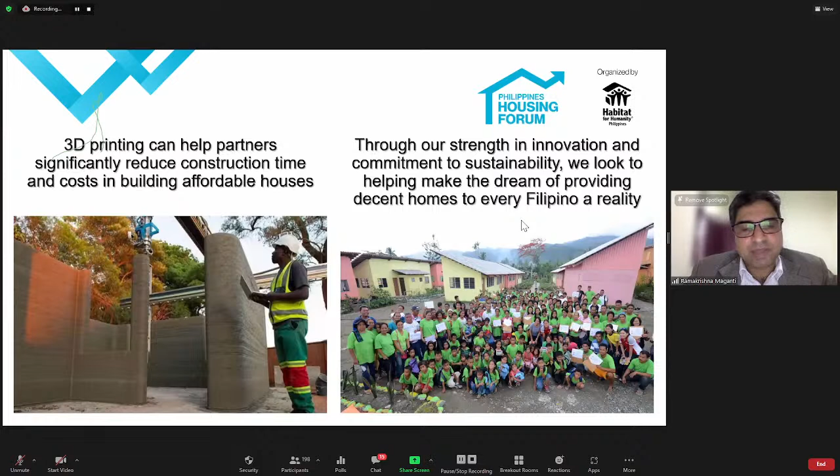Thank you, Mr. Maganti. Looking forward to the 3D printed house that you guys will make in the Philippines. And I'm really excited about water repellent cement. Looking forward to you guys launching that. Thank you. Thank you, Moni.

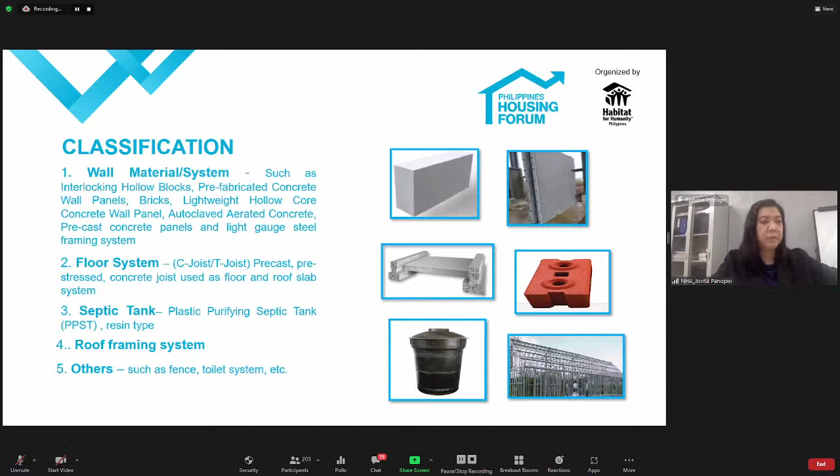So this is the process flow of how we accredit. First of all, the proponent will apply and submit their application to the AITECH Secretariat in NHA, and the AITECH Secretariat will check if the documents are complete.

If the documents are complete, then they will be issued an order of payment for the evaluation fee, to be paid in the Treasury Department of NHA. After giving the official receipt, that will be day one for their evaluation. Then after that, after a thorough structural evaluation, including the cost efficiency and if it's environment friendly...

If the technology is quite complicated, we request DPWH for a more comprehensive evaluation. But for 3-story and below, the AITECH Secretariat or the technical evaluator will finalize the report and prepare the consolidated report.

The AITECH committee meets on a quarterly basis. So every quarter, the interagency meets, and there they will deliberate the application for accreditation. So after a thorough deliberation by the members of the committee, if this will be approved...

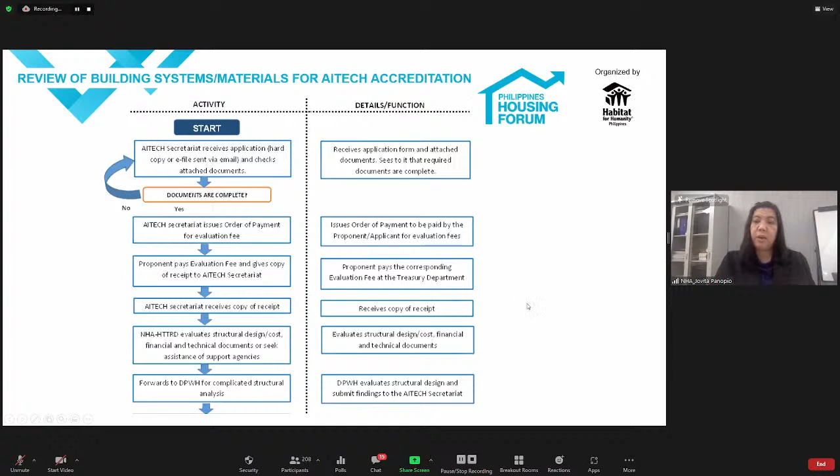After accreditation, we will be monitoring their performance because we base our evaluation on the documents submitted. In the monitoring, we will now verify the truthfulness of all the documents submitted.

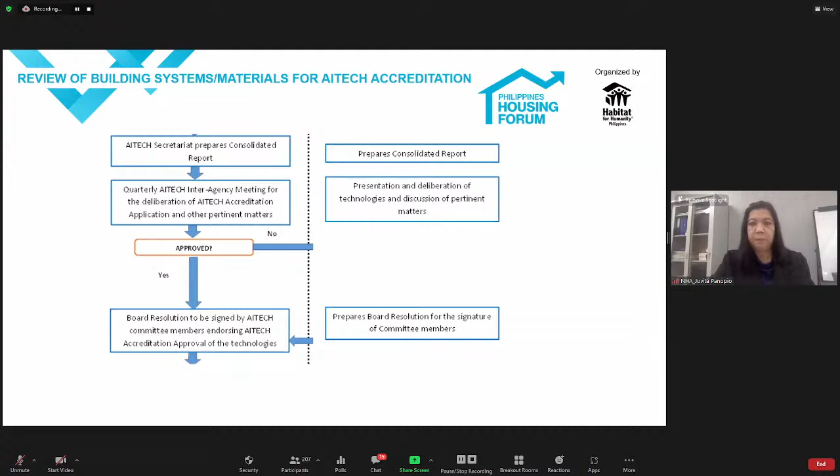So after the validity period, they can apply for a renewal. So that's all for the AITECH accreditation, and thank you so much for listening.

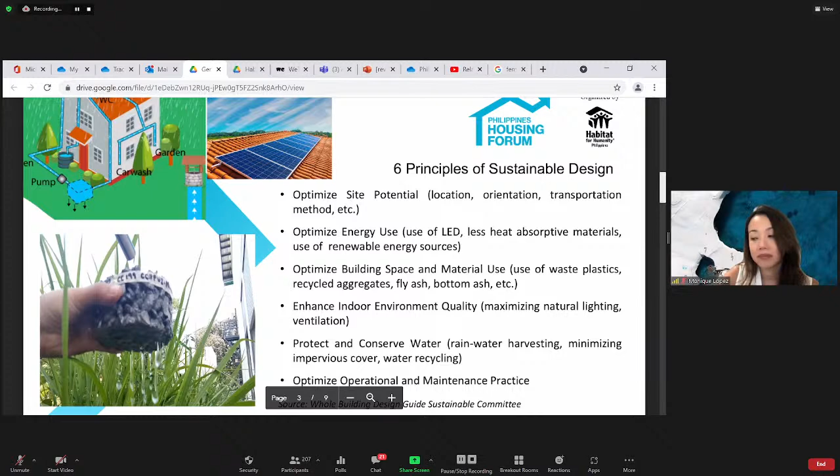So let me offer an alternative definition of sustainability. This is from the UCLA Sustainability Committee, and it defines sustainability as the integration of environmental health, social equity, and economic vitality in order to create thriving, healthy, diverse, and resilient communities for this generation and generations to come. I'm highlighting resilient, and we could see that a resilient design is a sustainable design.

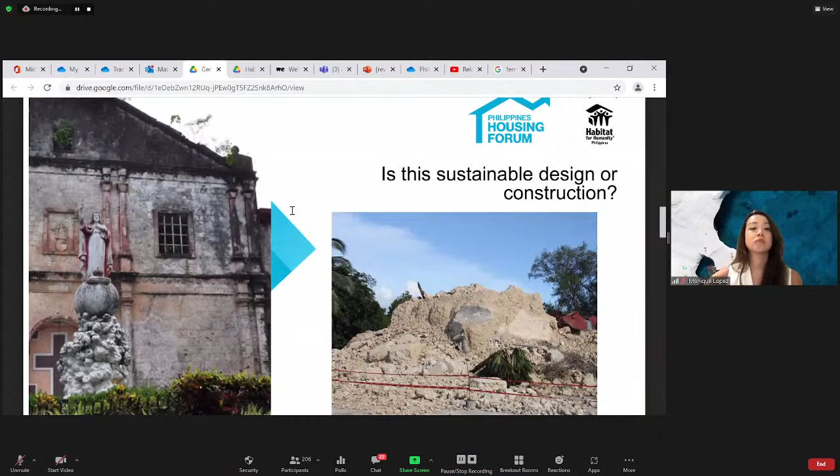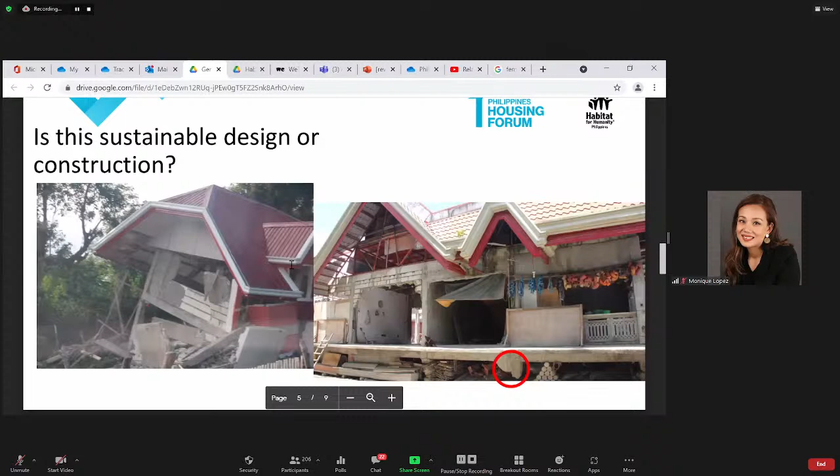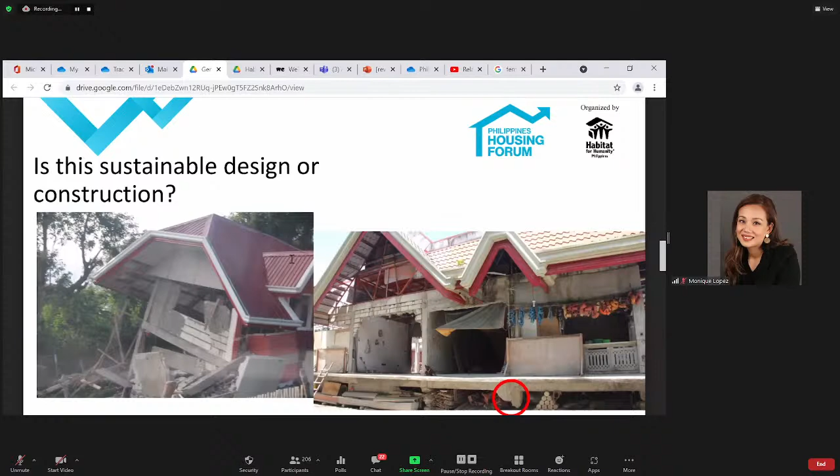Since structural conceptualization is now said to be part of architecture, please allow me to present some guidelines to show how resiliency could be obtained in design. So some guidelines for resilient design: provide a complete load path. There should be a continuous load path from the roof down to the foundation. Provide redundancy. There should be a backup system so that when a load resisting system fails, the backup should be able to absorb the energy, the load, without collapse.

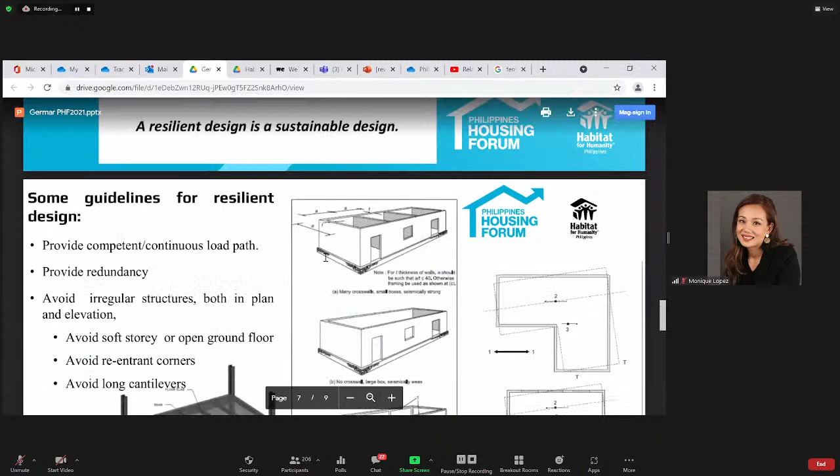And third, avoid irregular structures both in plan and in elevation. First, avoid soft-story or open ground floor. We have shown that in the previous example where we have soft-story failures. Avoid re-entrant corners like this. These re-entrant corners create stress concentration. And avoid long cantilevers. These are just some of the measures that may be applicable for housing or low-rise structures. There are other guidelines, but more applicable for high-rise structures.

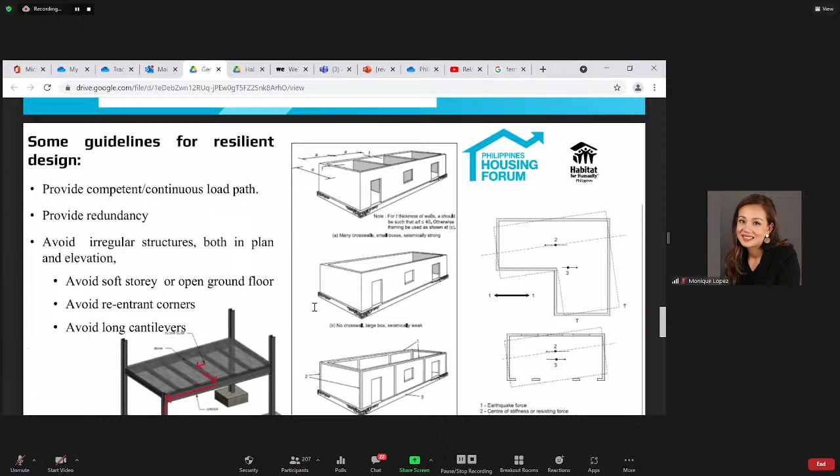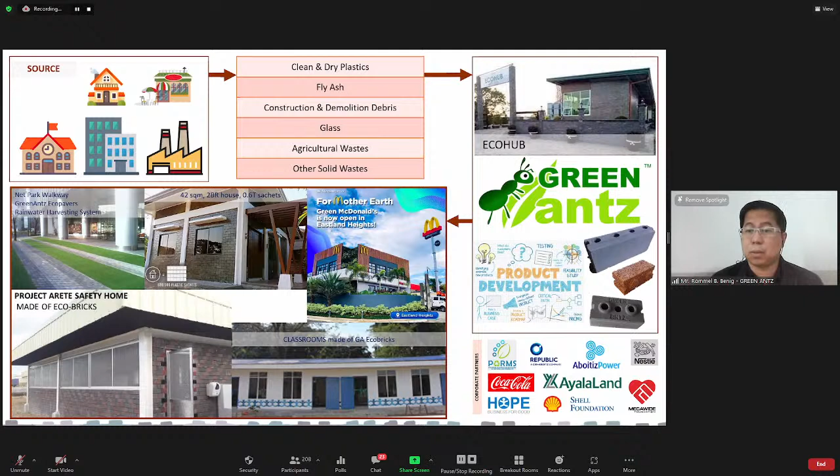Our flagship product is the Eco Brick, and then we supply these eco products or green building materials to the requirements of the construction industry. And at the end of life of the building or the structure, Green Antz can collect this debris, and then the cycle continues. So this is the circular economy model that we have developed since 2013. And we do this in collaboration with our corporate partners, local government units, and communities. Next slide, please.

So here we can see our flagship product, the Green Antz Eco Brick. So what is a Green Antz Eco Brick? It is basically an interlocking brick with plastics inside or other solid wastes. It is also a tangible example of the collaboration between Green Antz, local government units, private companies, and the community. So in effect, an eco brick is a building material with both social and environmental impact.

It is stronger by at least 5 times compared to conventional construction like CHB, and we have completely eliminated the plastering works. So it is more cost effective by at least 10 to 15%. Next slide, please.

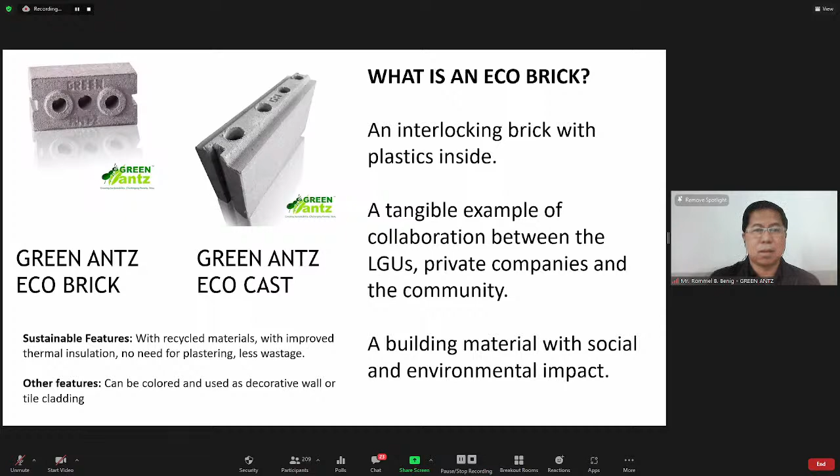These are some of the model units of some of the houses that we have built. Here we can see that a 42 square meter house like the one on the upper left contains around 500 kilos of plastics. And we have a one-bedroom house, a 24 square meter unit that used around 300 kilos of plastic. So we are using plastic to substitute some of the sand and gravel. And that's another environmental impact of Green Antz. We are reducing the amount of sand and gravel that we quarry from the environment, aside from addressing plastic pollution. Next slide, please.

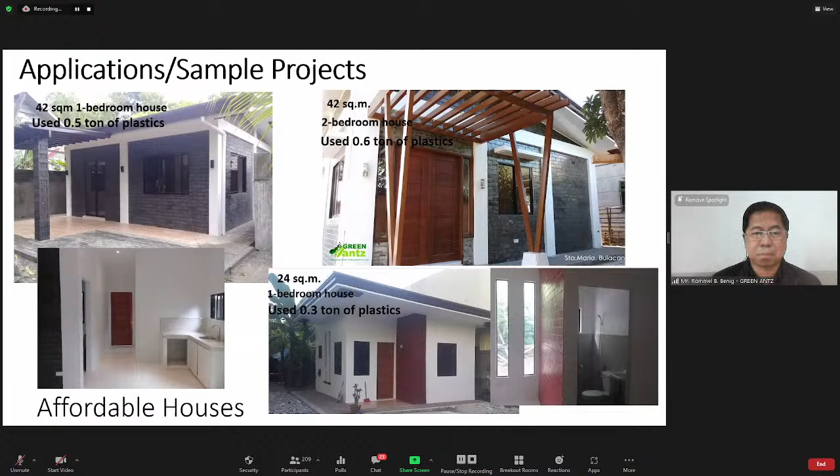In this particular slide, I just want to share with you one project that we did with our partner from Mati City. So our partner is a developer. We supply them with the eco products, but first we set up a Green Antz Eco Hub in Mati City, close to the project site, and then we supply them with the eco products which they use. So they were able to get the green light from Pag-IBIG, and they were able to offer the houses at 10% down payment, which is really very attractive for developers.

And then they will continue building the houses, and later on, Green Antz will be working with them in terms of managing the plastic wastes. So we convert waste into a resource, and then the circular economy model continues. And we intend to replicate this model across the different cities and municipalities in the Philippines. So we are also working now with Habitat for Humanity in Tacloban so that we can do a similar model.

So really, we can treat waste as a resource, use plastic waste to produce building materials, and then use this eco product to build green and affordable housing. So really, this is a smarter way to build, not just a greener way to build. Next slide, please.

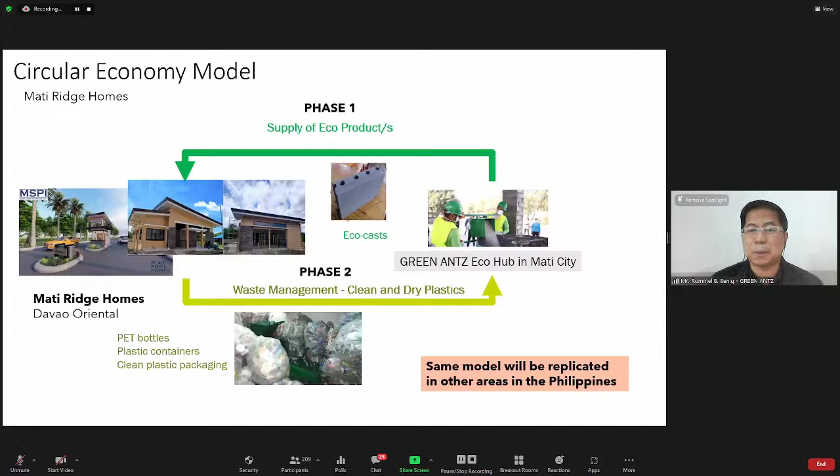Okay, so that's the last slide. Thank you very much for allowing us to share with you what we do. And as we always say it in Green Antz, let's clean up the Philippines, let's clean up the world, one community at a time, one brick at a time.